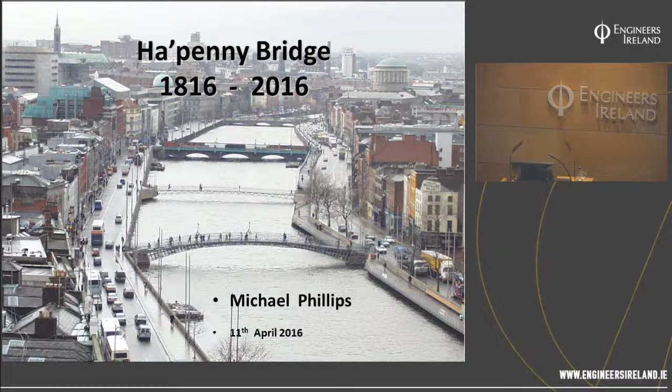A lot of the information in this paper is sourced from a more technical paper given in 2012 by Patrick Gorman, who was a senior executive engineer in the City Council, so there's a good reference point there. It's one of the things that when you work on a bridge like the Ha'penny Bridge, which requires conservation, you really need somebody who has a love for conservation and takes a real personal interest in it, because from the minute you peel off the first cover, nothing is as it appears. You need somebody who makes decisions, who appreciates the importance of it, the aesthetics, the conservation, and most importantly today, the safety aspects. Patrick Gorman was one of those engineers who brought everybody on board, and Bruce Arnold was there as a conservation architect, and we had very good people who were really dedicated to it at the time.

I'm just very fortunate. I was city engineer at the time, and to have people on your staff who can do that type of thing. As you can see from that picture, I've quite a few slides, so I'll flick through them as quickly as I can. Just to give you an indication of the issues and the problems that are there, that's why we'll put the pictures up.

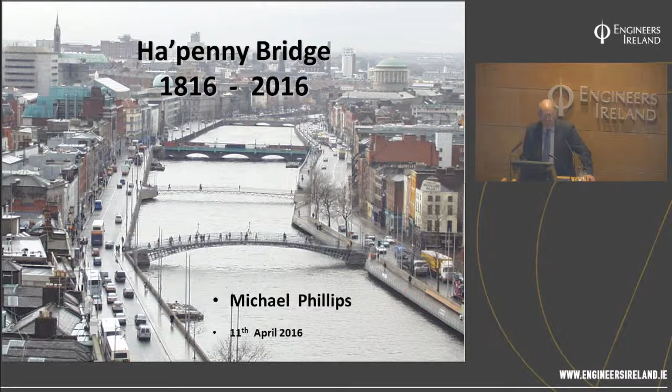You can see from there, it is very central in the centre of Dublin. It was how Dublin was recognised. It's not a suspension bridge, it's not a cable stay bridge, but it's how it's recognised. The Samuel Beckett, I suppose, is the modern day one that people will recognise, but this was really the jewel in the crown at the time for the bridges. But I'll take you through it as you do.

Just to give you an idea, you've got to show where does it sit and how it works. Look at there, you can see the Ha'penny Bridge is up just here on the right hand side, but it gives you an idea where the bridge was when the Vikings came in.

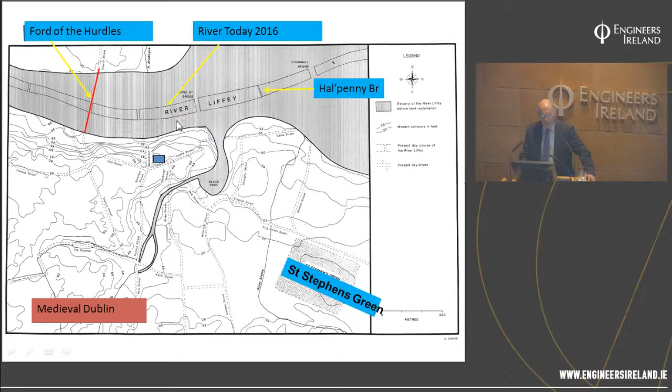And this is the Black Pool, and you can see the grid actually in the quay wall here if you stand on the Millennium Bridge. But this was the ford that would have been recognised around the year 1000. What that ford also means is that people could cross the river at low tide. Everything below that, even at low tide, only at exceptional low tides could you cross at another ford. So it gives you an idea that when you start moving down river here, you're really moving into the deep water side.

This gives you an idea of the ford that would have been there in the year 1000. When we were doing publication for the website and for the bridges over the Liffey, we got an archaeologist historian to actually work on this, because they talk about cattle being brought across and everything like that. So what would a ford have looked like?

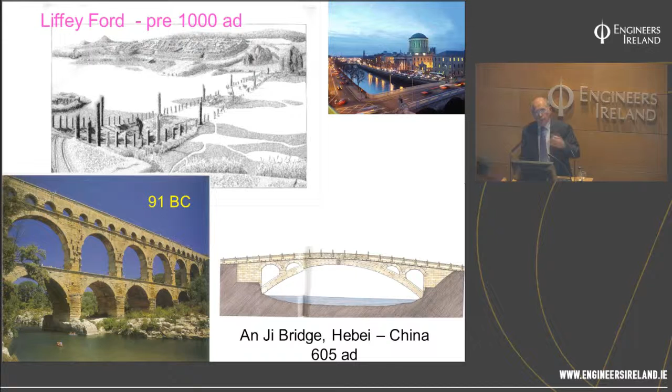Now that was in the year 1000 AD, but to give you an idea, you had the Pont du Gard there in 91 BC, and you had the Anji Bridge in 605 AD. This bridge here gives you an idea of the span, but also the principle of the weight being taken off the abutments with the arches as well. So it gives you an idea that technology in other countries, the development or evolution of things, was way ahead of us in Ireland at that time, which is a bit surprising when you consider the monks going backwards and forwards, that it hadn't come back with them, so it didn't.

But when you have a river, I suppose it starts with that you have a ford, and then when you don't have a ford but where you have water, you have ferries.

But the thing about fords particularly is the loss of life that actually occurs, because people will try to cross them. We see it even with floods today, that people will think the river is safe to cross, and it's not safe to cross, and boats will overturn, and we see that particularly in other countries today. So when you build a bridge, the number of fatalities goes to zero, and that's one reason why bridges have quite a strong affiliation with the general public, not just with engineers.

I give a talk on bridges over the Liffey in various libraries, and there's never less than 50 people, and some nights it would go to 70 or 80. One night, in actual fact, it was a ladies' historical society that had asked me, and there were 70 of them there. So it gives you an idea.

So when I was talking to a person who's building bridges in Africa about 2 years ago, I was talking about this idea again of the village and the people with the bridges. And what she said was, she was an engineer working in Uganda, and she said, actually Michael, it's not the elimination of fatalities that makes bridges so important to a local community. It's the elimination of fear. And I had never really appreciated that.

She said, it's the fear of the children going to school, and will they make it home? It's the fear of your partner going to the market with the vegetables, will they make it back? Because in the intervening hours, the river could have changed its characteristics and be in flood or whatever it is, this worry. And she said, that's really what you begin to realise - they will tell you it's the elimination of this fear.

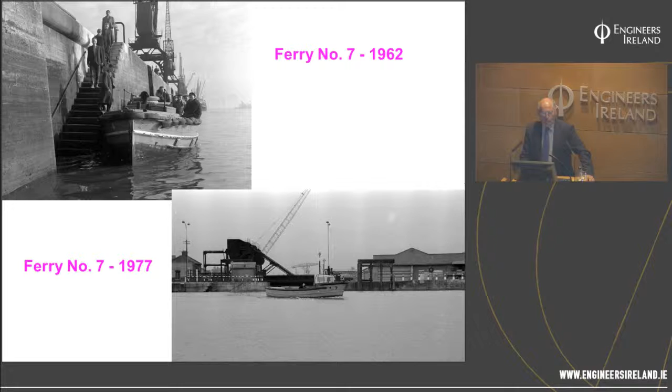And this is part of what actually happens here in Dublin - it actually eliminated the ferries with the building of the bridges. And the Ha'penny Bridge, which you see here, is just one of those areas.

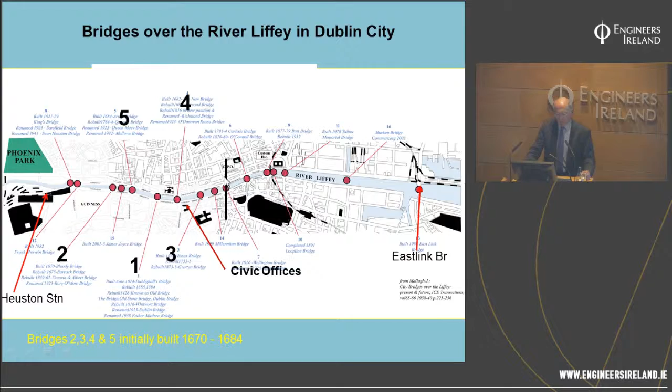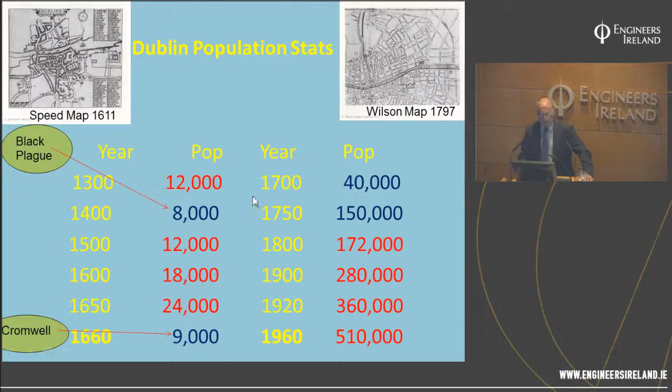Because that was the one that you'll read about in the books, where they had barbecues on the River Liffey - it was frozen over. But what actually happened was, they think there was an explosion or a volcano in the Pacific which stopped the winter, the following summer coming in here, which meant that all the potato crops failed in the ground as well, and lots of people died or were frozen to death. But it gives you an idea of the demands that were going on.

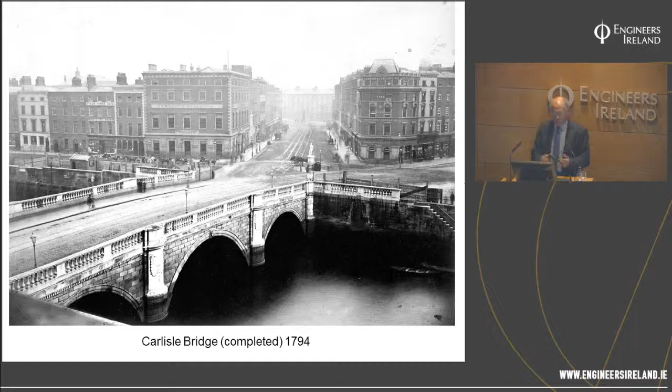Now, the Ha'penny Bridge was built in 1816, but you already had Carlisle Bridge, which became O'Connell Bridge, built in 1794. So it gives you an idea that they had already built this bridge downriver using caissons. The first use of caissons actually had come in with the Capel Street Bridge, as you would know it, or Grattan Bridge as we would know it, by a man named Semple. So the principle was established about 1753. Then in 1794 came O'Connell Bridge, with the building of the Custom House and the moving of the city centre from Capel Street to O'Connell Street. You began to see a move eastwards. But this is just to give you an idea of the other two main bridges that would have been built around the same time.

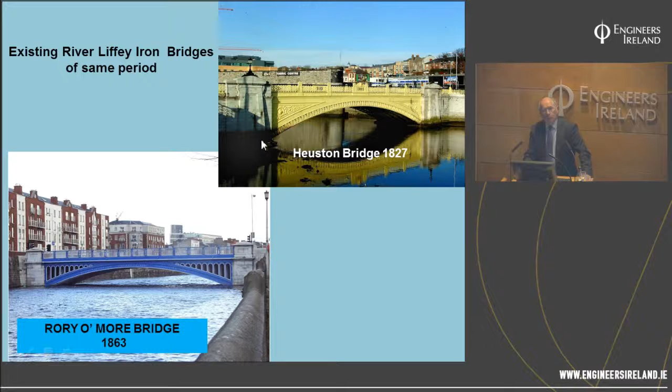The Rory O'More Bridge, which is an absolutely beautiful bridge, was built in St Helens in Lancashire and floated into place in 1863, replacing a stone bridge there. And then you had Heuston Bridge, which was a new one at the time, but that was cast just above, where Hickey's fabric place is. There was an iron foundry there, and it was cast there and just lifted out into the river.

But then the Ha'penny Bridge was actually - we've no documentary proof, but everything totally indicates - fabricated in Coalbrookdale. Coalbrookdale is a place in Shropshire, England. Abraham Darby the Third was the man. His great-grandfather, Abraham Darby the First, actually set up the place. And you start to say, why did Coalbrookdale become so important? Well, the first cast iron bridge that's still in use today, recognised nearly worldwide.

There were other ones, but they weren't of the same nature and they didn't last. It was completed there in 1781. It had a span of about 30 metres - I'm sorry, I don't have the width offhand. But then in 1791, ten years later, the abutment moved. Now, the abutment moving on single arch bridges is quite a normal thing. It's because of the thrust, and nobody knew what was there, so you had this continuous movement.

And the designer there was John Winsor. In 1973, they totally refurbished that bridge. What they did was put a concrete strut along the river bed to keep the abutments from moving any further, so they're coming closer together.

But the main reason why Coalbrookdale was so important in history is the coke. They started to use coke there to do the smelting of the iron, rather than timber, which had been used before. It was this development of coke in Coalbrookdale that really gave a kickstart to the Industrial Revolution, because suddenly they could do large volumes. And what they started doing was developing pig iron into ingots, which could then be used in other smelting places further down.

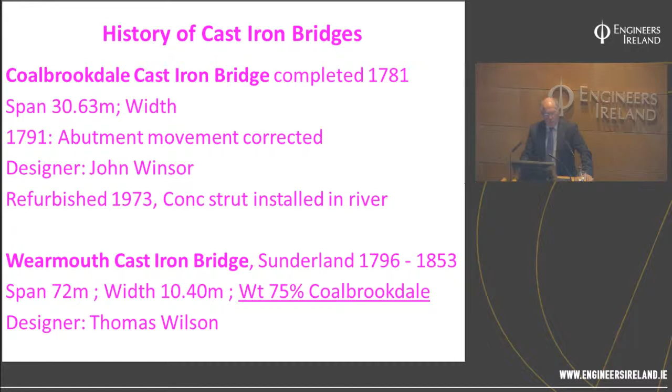Part of Paine's bridge design was actually used in the Wearmouth Bridge, and Thomas Wilson did an awful lot of bridges out of the Walker foundry.

So then when you look at Dublin, how did the ferries come about? The city council had a charter from Charles II and let out the ferries - you couldn't just set one up. The one at Ha'penny Bridge was known as the Bagnio one, referring to a brothel that was on the south side, just where that ferry came ashore, and that's how it got its nickname, like everything in Ireland.

The Ha'penny Bridge is also located in the tidal zone, as I said, and Essex and Carlisle Bridges were completed earlier. The span here is about 42.8 metres, the width of the bridge is 3 metres, and the rise over the full span is there.

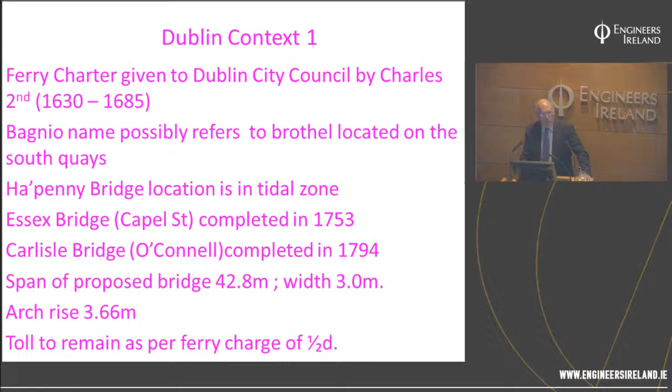The toll was to remain at a halfpenny. When he got permission from the City Council, the toll was to remain as a halfpenny - which was the ferry charge - and also that if the citizens of Dublin didn't like it, he'd have it taken down within 6 months.

Now, like everything in these countries, nothing is really a straightforward decision. We look at the complexities of society today and how we've got to keep everybody happy - back then those complexities were there too, maybe on a smaller scale. There was a guy named John Claudius Beresford, whose father before him had been a major leader, unofficially the King of Ireland. He was an alderman, a member of the council, but also involved with the Port and Docks and the Revenue Board. The Lord Lieutenant at the time fired him, saying he should have nothing to do with it because of all the dealings he got involved in. He was so powerful that he had the Lord Lieutenant recalled - that's how he was reinstated into his job. It gives you an idea of how powerful he was.

His family were also related to other Beresfords in Derbyshire who founded the Butterley Iron Company. The reason I mention that is his daughter married Walker's son, who was the guy working with Thomas Paine - so you can see they were involved in the iron industry, and he was aware of it as opposed to masonry.

Now what actually happened was in 1802-1803, the bridge just upriver as you come down from Christchurch collapsed in a storm. The bridge designer Thomas Wilson was invited by the City Council to come over and see could he propose an alternative. William Walsh, who had the ferry, and Beresford were on the City Council, so they would have been aware of this. Wilson actually put forward a single span to cover the bridge, but the City Council didn't accept it, and they went instead with the 3 stone arches you see there today.

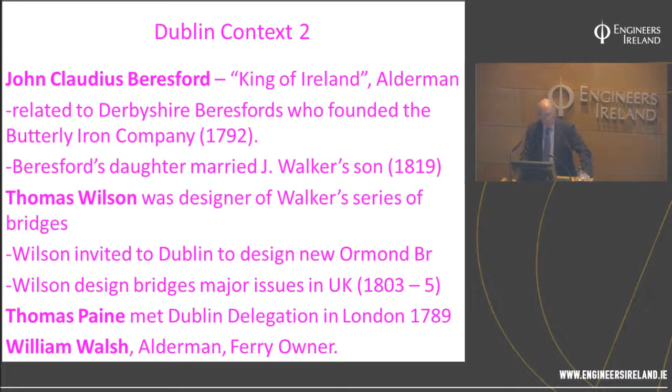This gives you an idea of the Sunderland one that was there, and that was only taken down around 1853. So they then approached Coalbrookdale.

This is how we end up going back to Coalbrookdale, with the experience of Beresford, who would have been well aware of the technology, and William Walsh, who was the guy who had the ferry. They went to Coalbrookdale, and Coalbrookdale came up with this single arch, which at the time was quite fantastic. When you look at the Liffey today you might think it's quite calm, but you've got to appreciate there are three dams on that river, so it's very well contained now. You can imagine when the rains came down, it was quite normal for at least one bridge a year to collapse on that river, because the arches would be eroded by the ground and the water.

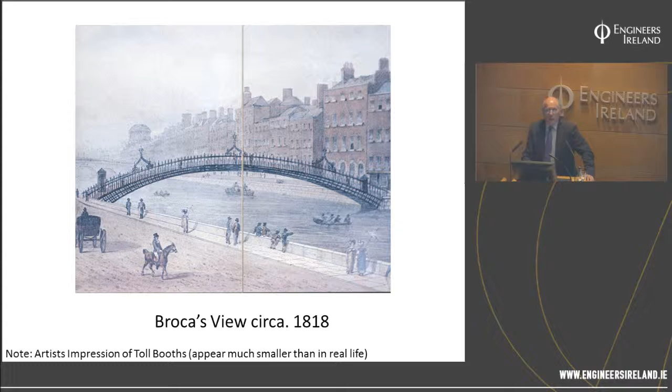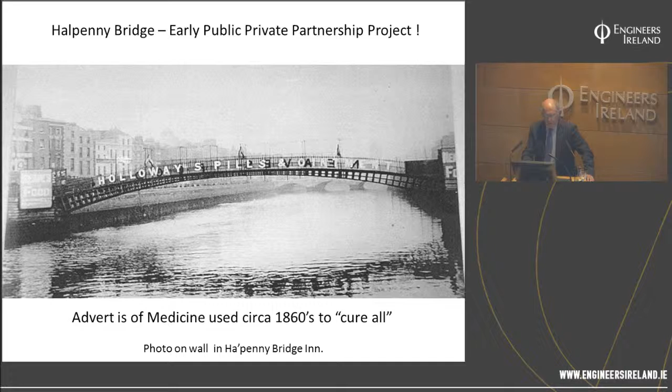He decided then on this design, and this was the bridge that got built at the time. You can see the hiring out of space, which we've sort of gone back to nearly again today with the public-private partnership model. Then there were the turnstile booths, which we have very few pictures of, and they were there on the south side.

While the Chairman was talking about the love relationship with the bridge, there was also a hate relationship. The bridge has gone through periods of love and hate. Hugh Lane wanted a place to put all his paintings and wanted to build a gallery, so his whole idea was to take down the Ha'penny Bridge. He hated it, and wanted to build a gallery with a Ponte Vecchio like the bridge in Florence, and put all the paintings in that.

There was another man who was a very strong personality at the time in Dublin in 1914, Martin Murphy, who was involved in the lockout, and he said you shouldn't waste taxpayers' money on such a thing. Then Hugh Lane got worried about fire or dampness and things like that. But while this was all ongoing, Hugh Lane happened to be on the Lusitania, which sank.

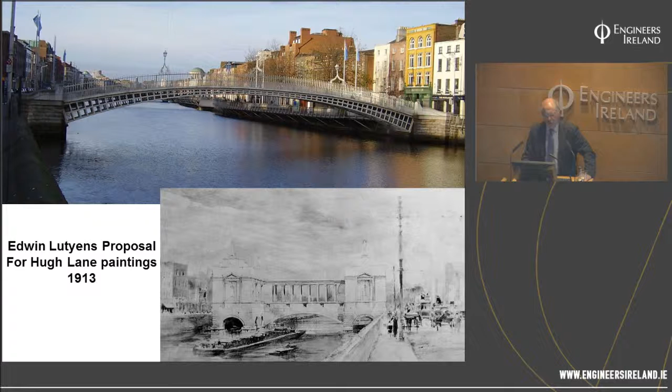Then there's the story about whether his paintings should be in London or Dublin, and what they did was split it halfway. It gives you an idea that there was a love-hate relationship, and there were fairly powerful forces there as well. But the historical facts are as I've already said.

One of the things is that cast iron has a low tensile strength, is brittle with no ductile range, and the problem was that quality control was always an issue. It had many names.

It was called the Wellington Bridge because of 1816, the Battle of Waterloo. The Triangle Bridge got its nickname because Beresford was involved very much in putting down the uprising of 1798, and one of the torture treatments was the triangle at the time, where they flogged people, so Dublin people called it that because he was associated with it.

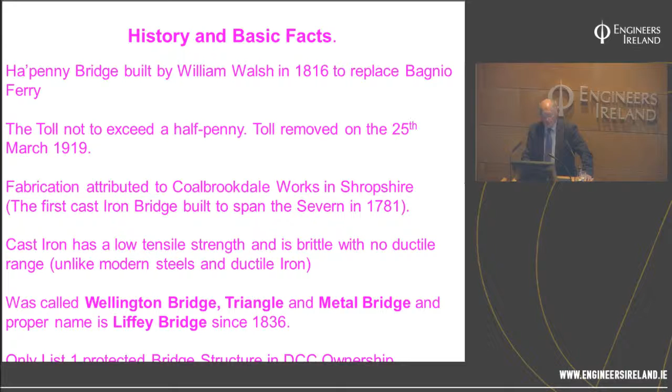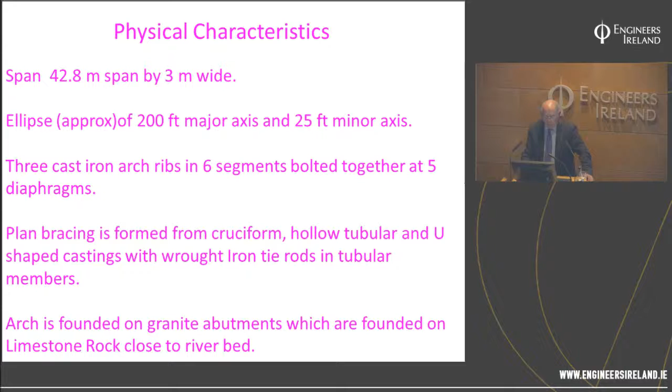Then you had the Metal Bridge, but the proper name is the Liffey Bridge. It gives you an idea of the ellipse, and that's part of it. There are three cast iron ribs bolted, and it's founded on the granite. The river rock there is actually quite high, so it sits right on the river bed. We're very, very fortunate there.

In 1998, we decided we needed to act, because there was no access for people who had difficulty walking. The sheer volume of people at that time was about 24,000 people a day crossing it, over a 14 to 15-hour day, not a full 24 hours. So we had serious concerns, especially where it came ashore at Temple Bar, about the safety of people on the footpath given the volumes of traffic.

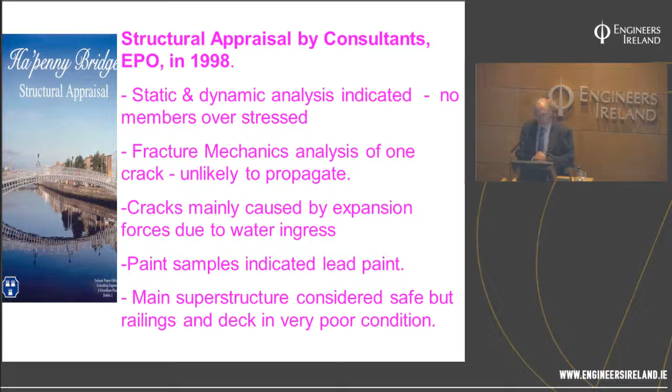So we had a structural appraisal carried out because very little maintenance had been done. What we found was that no members were overstressed, and a fracture analysis of one crack showed it was unlikely to propagate, with cracks mainly caused by expansion forces due to water ingress. Paint samples indicated lead paint, and the original paints had just been painted over repeatedly. The main superstructure was considered safe, but the railings and deck were in very poor condition.

Just to give you an idea of the location, they call the South Quays here Crampton Quay, but most of us would know it as Ashton Quay. Then you have Bachelor's Walk on the north side, and Liffey Street.

When you go to do something with a bridge like that, you have an awful lot of what we call non-technical issues. First, it was a very confined site because of the sheer volumes of traffic. All the works had to be carried out from a pontoon in the river, and the navigation channel had to be kept open because boats went up and down the river. Then there was the impact on local business, which was one of the major issues, because on Liffey Street, people felt that about 80% of their business came from people who came across the Ha'penny Bridge.

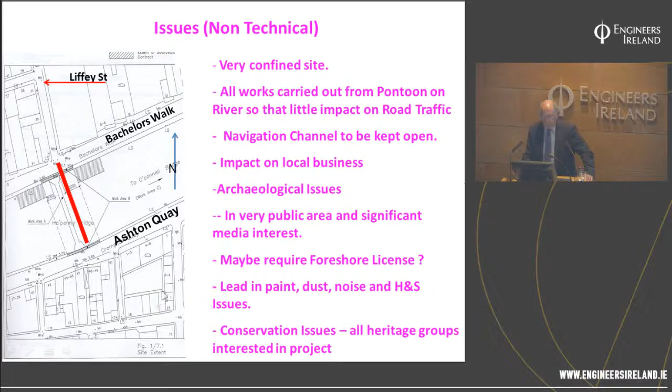Then there were archaeological issues, both on the ground and in the river. Did we need foreshore licenses? Then there was lead in the paint and dust issues, and the conservation issues. Everybody took an interest in it, so they did.

So what we did was, we had a plan for a Bailey Bridge to be put across as a temporary bridge, but we decided to try it for about 24 hours without one first, and as you know, all hell broke loose. So we had the Bailey Bridge put together over a weekend and put it in, but it was already in our plan.

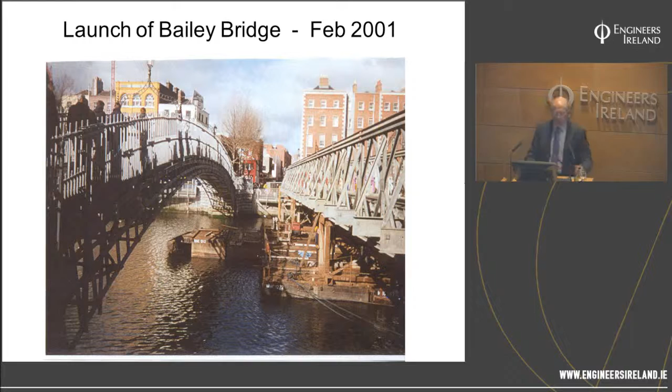If any of you remember that, quite a number of people wouldn't cross the Bailey Bridge because, although it was perfectly safe, it was bouncy, and quite a few people felt slightly unsafe with the bridge bouncing due to the sheer volume of people on it. But as you know, they're very, very strong structures, so they are. That was part of the process.

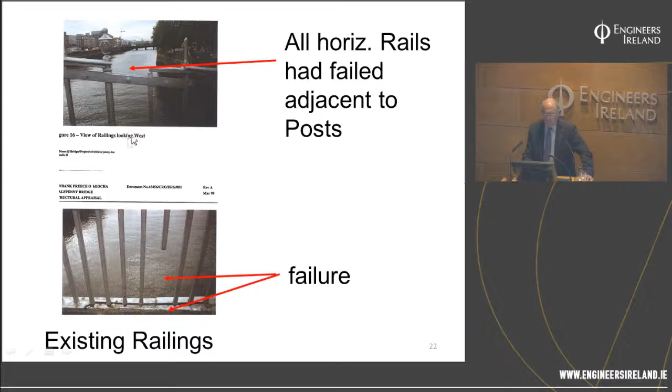Just to give you an idea, you can see here the railings had failures, with pieces missing. And again here, the railings were supported off pieces they shouldn't have been supported off, and scaffold poles were used for temporary repairs. It was really in a very bad state, so it was.

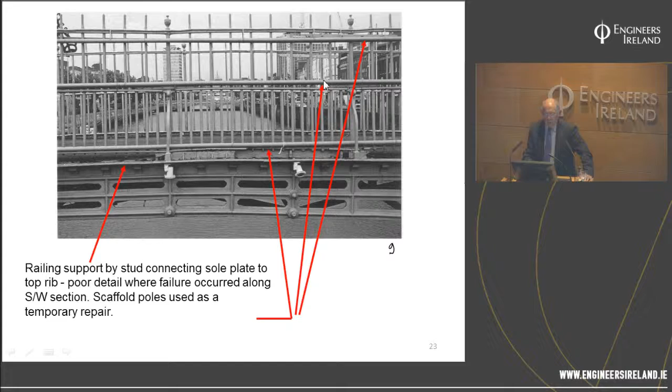The superstructure overall was in good condition, but we did dye testing for cracks, railing checks, and paint testing. What we found was that the geometry of the original build of the bridge wasn't built the way it was meant to be built. There was an imperfect ellipse, and there was no bracing in some bays.

What we discovered was that, for instance, part of the bridge here should have actually been at the opposite end, things like that. But the bridge had held up during that period of time, so it had.

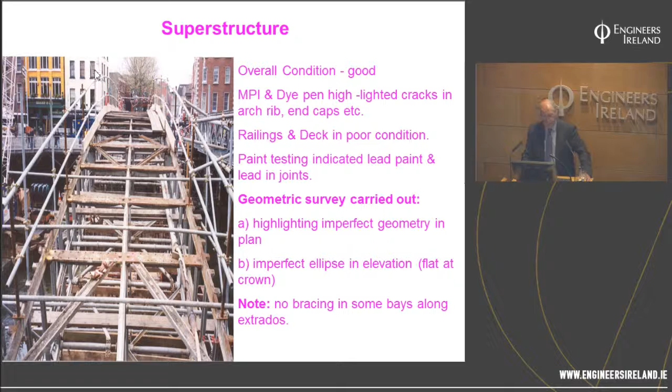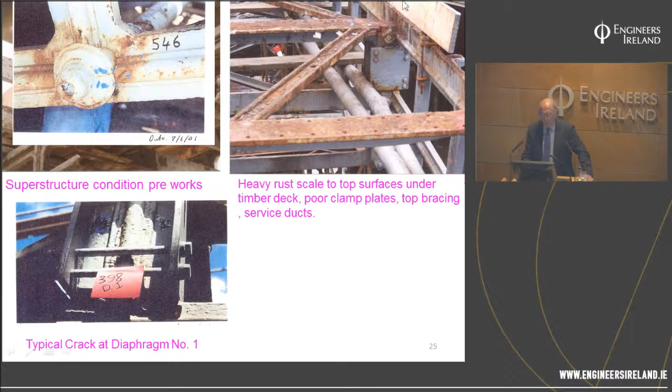This gives you an idea of some of the conditions of heavy rust. With this channel, you might think it provides strength, but what that web did was gather water as well, causing rust and similar issues. So we had major issues there. You can see a typical crack at the bottom as well. And we couldn't actually take off those caps.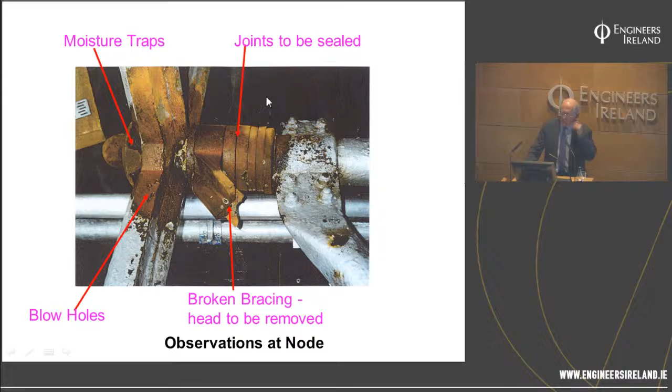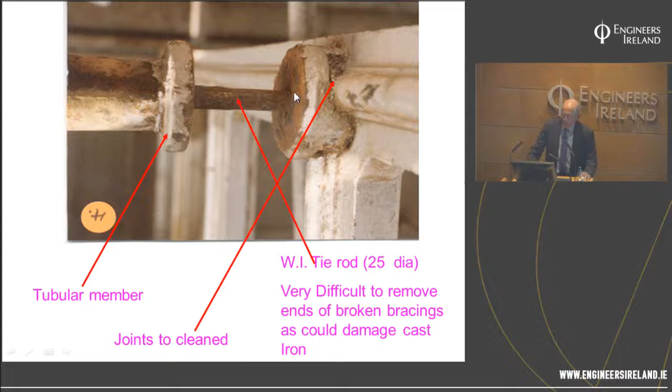We had to work around them. You can see where there was broken bracing, joints had to be sealed, moisture traps and blowholes, and it was very difficult to remove the broken ends. Everything was seized on it, so we had to work very carefully to get it out.

When the original survey was done, we did a survey, and when the contractor was tendering, it was based on what you could see. But when you actually went in underneath, it was a totally different ball game, for want of a word.

So the job had to be divided into two parts. One was the pieces you could take away and have either refurbished or new pieces fabricated off-site, and then the pieces that had to stay on-site.

For the piece on-site, it was even a worry that we had to scaffold it all out and put sheeting all around it to protect it. One of the problems with that is when you put the scaffolding and sheeting up, if strong gale force winds are coming, you then have a lateral load on your bridge, and is that going to create problems? All these things had to be taken into consideration at the time, as well as putting temporary supports in the river.

These were pontoons resting on the river bed. Will it affect the flows if we get very heavy rains and a lot of water has to be released, or extremely high tides? So you had to take all these things into consideration, do a risk analysis on it, and see how it would work.

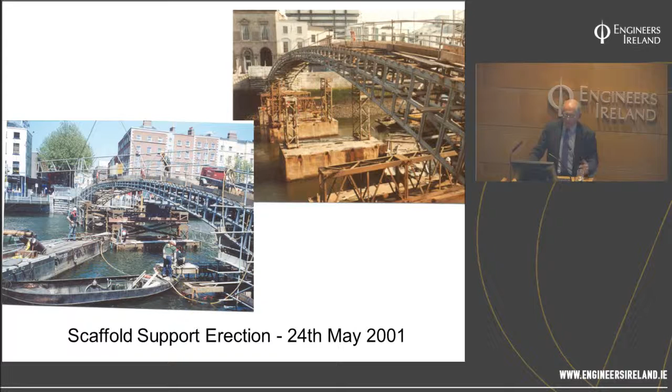This gives you an idea of the sheeting and scaffolding that had to be carried out over the full length of the bridge, so people could work there, but at the same time making sure there was no dust being carried around or the river being polluted at the time.

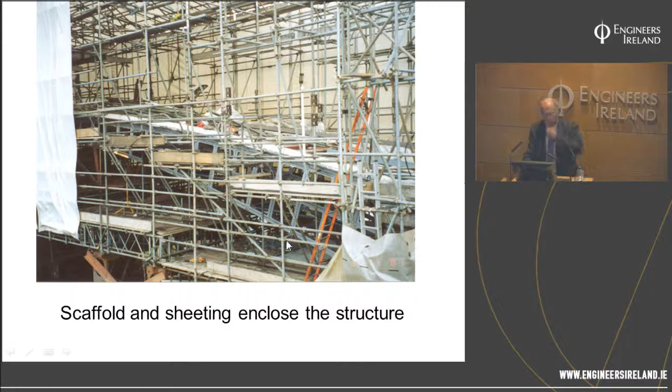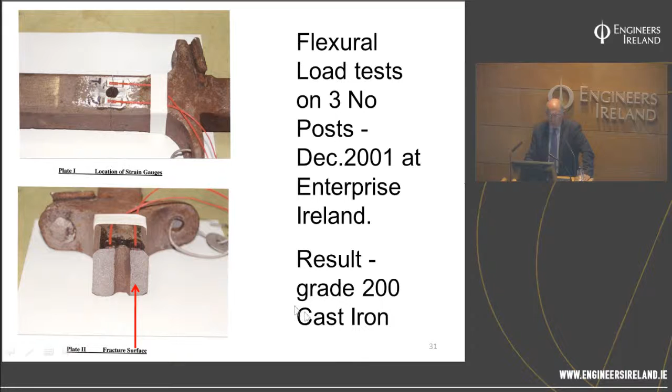We had flexural load tests carried out on all these pieces, and the result was a grade 200 cast iron, because how do you actually work out what the strengths were? Various pieces were taken off-site for examination, testing, refurbishment, and for Brinell hardness and those types of tests.

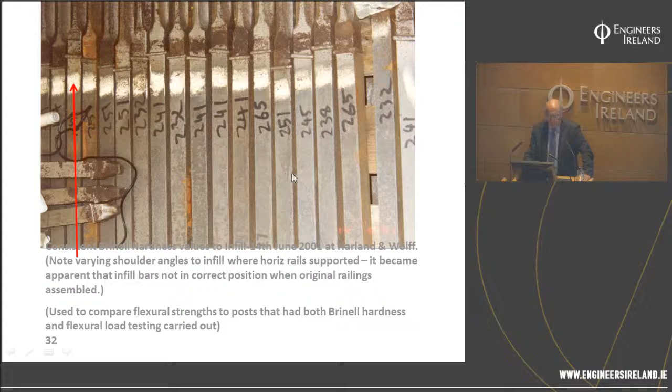Here you can see where a piece was broken off on this side and other parts were cracked. So there were various options on how to put the railings back in while maintaining conservation and the importance of the bridge, and how we actually fix them to the deck to ensure that they can be safe.

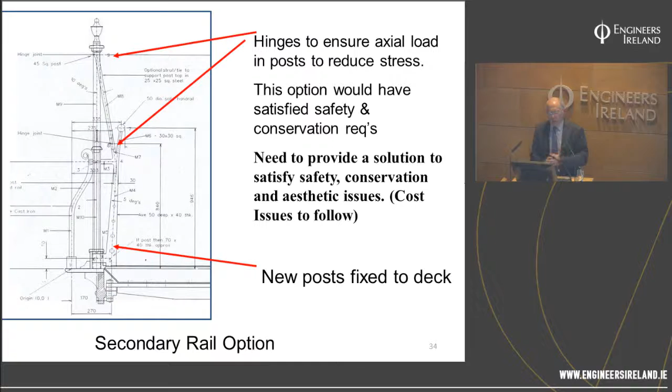The other question that arose is how do you define what's a safe deck and railing for the crowds of people crossing this bridge? One worry about a pedestrian bridge is that if a lot of people are watching something on the river and they turn to look at the other side because something passes underneath, the loadings that arrive on the bridge affecting the railing can have severe effects, the worst situation being that the bridge would turn over.

We were very fortunate that in the 1973 refurbishment of Coalbrookdale, they had the Road Research Laboratory in the UK carry out actual crowd testing of railings to see what the rails on their bridge could take, and that provided us with a great baseline to work off. So then what we had to do was look at the infills.

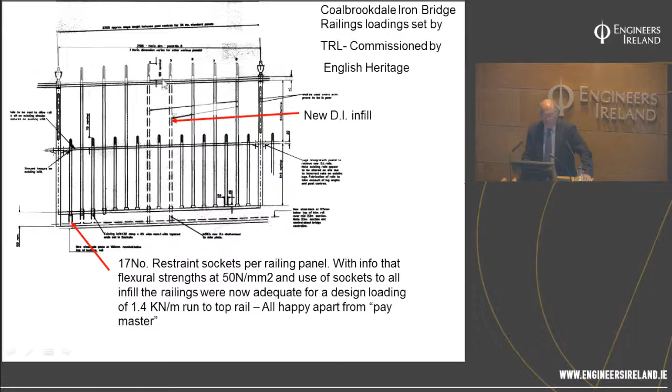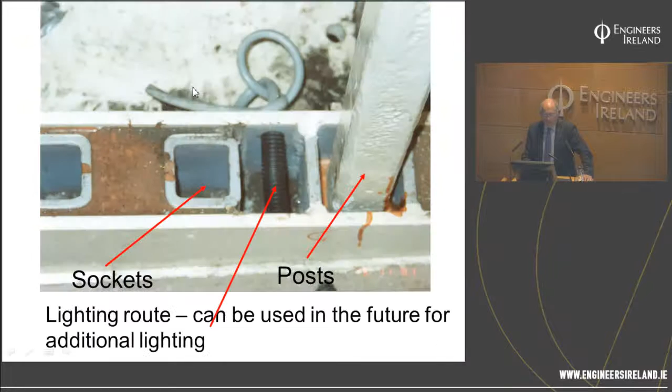Everything had to be measured because nothing was really replicated in the original, so every item had to be done individually. This gave us an idea of where the sockets and strengths had to be built in, and then the ducting for electrical lighting to go in afterwards.

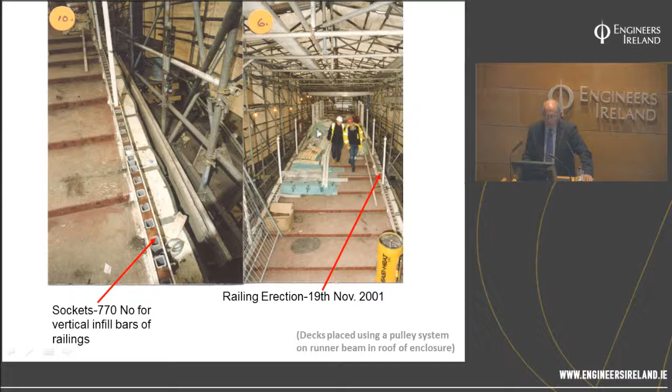This gives you an indication of what it was like inside, and you can see the finished deck as it was put into place, the railings being erected, and the sockets being installed.

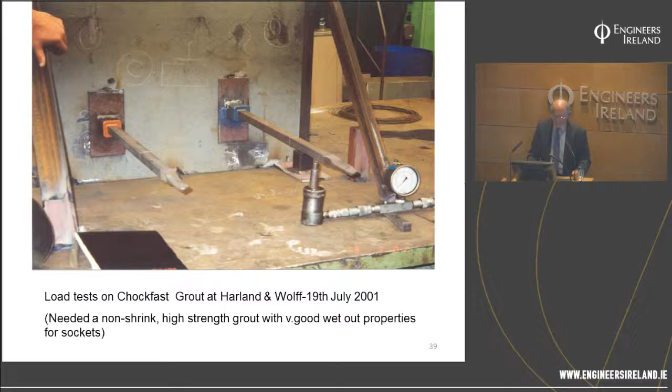Because everything was a one-off, everything had to use the best grouts. So we even carried out load tests in Harland and Wolff, who were the main contractor, to actually test the grouts, to make sure they would achieve what we wanted.

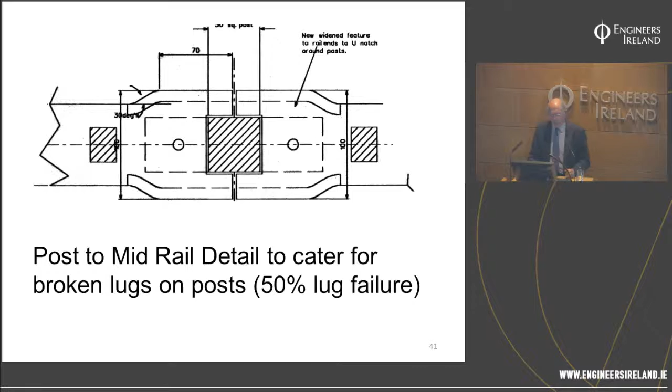So the grouts were put into position, and this was the railing post, because we had to try and maintain the old railing posts with the new fixings. Chockfast was the stuff used, and you can see the difference before the final coat of paint goes on. Then we had to get these finials done.

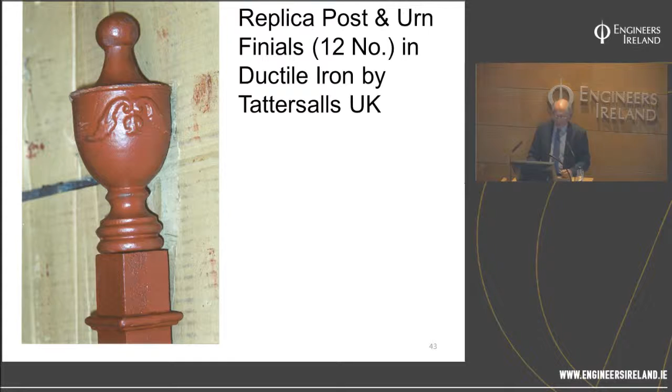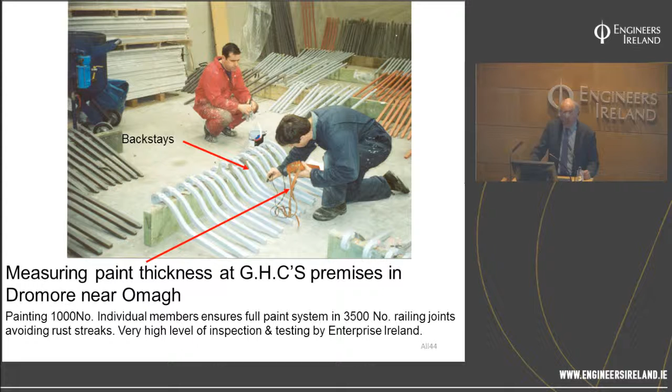For the deck, Enterprise Ireland actually carried out all the testing for us, and every piece was tested. We just didn't spare on it, because when you take a bridge like this asunder and put it back together again, nobody's going to be looking at it for a long time.

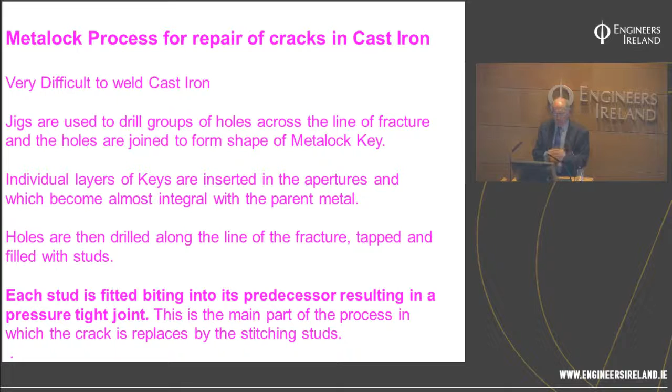One of the things was, what do you do for cracks that appear? It's very, very difficult to weld cast iron. We did do it in one or two locations, but it's not something you can carry out throughout. So the Metalock process is where you drill holes and put in pieces of iron. It's all done cold, can be done on site, and they're like keys inserted that become integral with the parent metal, then filed down.

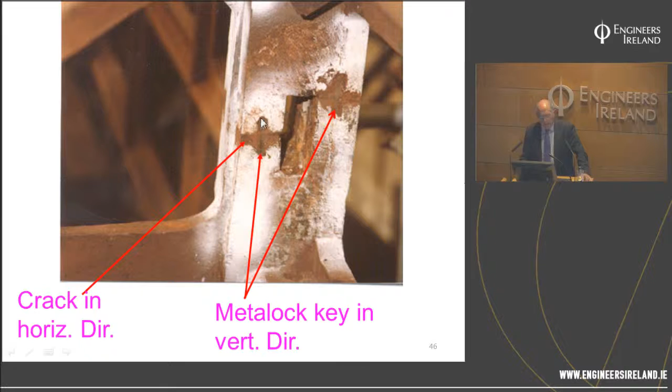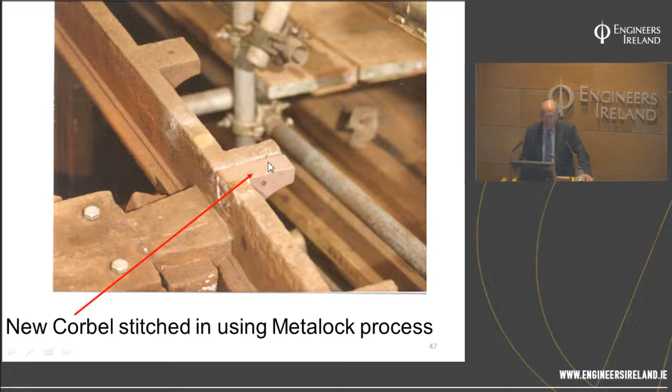This is what you actually have here. You can see the stitch in the vertical direction and in the horizontal one, and this is a vertical one over here. It's a patented system, but you can see where it was fixed onto a member as well, using the system. And it worked extremely well.

But the problem then arose coming down to the abutments, where you can see how the deck lifts off in the old bridge. The old bridge originally was just timber, and if you remember the other bridges that opened for the Millennium, one in Paris, one in London, and one in Brazil or somewhere, they had timber decking, and when it got wet, everybody just slipped and slid all over the place. So they had to close three of them.

We became aware of that with the Millennium Bridge, just upriver, and we used aluminium there. But on this bridge, there was timber up to about 1970, then felt was put on it because of the danger of slipping. But as you can imagine, roof felt on a bridge deck is not really an acceptable solution.

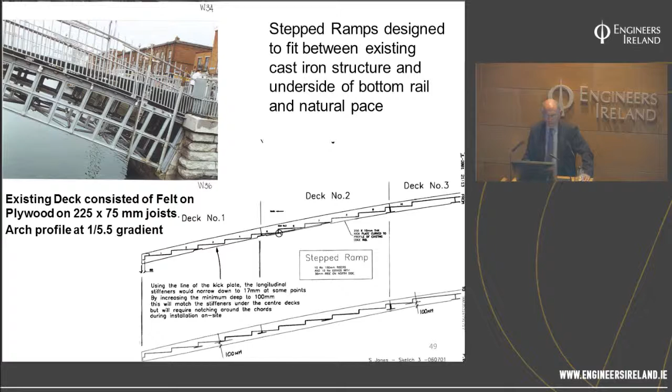We also wanted to make it more accessible. While we knew it would never achieve full wheelchair accessibility, we wanted to make it as acceptable as possible. So we had templates carried out by Harland and Wolff of the whole deck to see what the structure was like. Then a whole new deck was designed using metal to give us the steps you see there today.

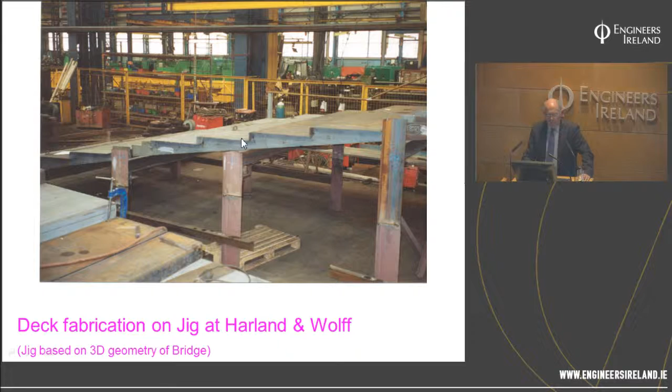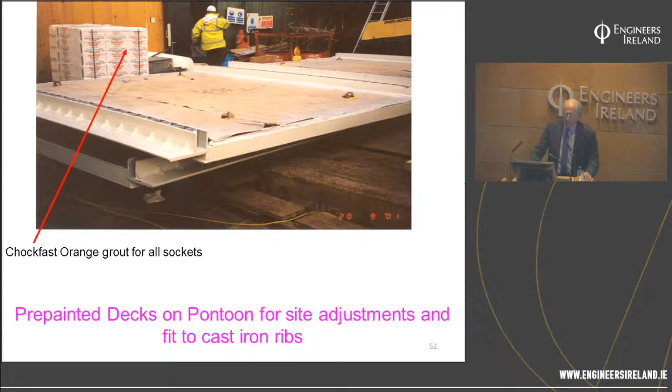Now, one of the other parts was that on the deck, the site works had to be done on site, and it all had to be shot blasted, and you can see there how the shot blasting was carried out.

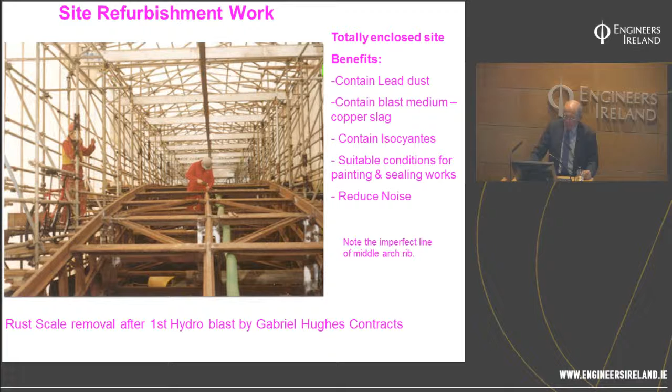What we found was, because the site was totally enclosed, everything could be contained on site and then moved off site easily. But we found that wasn't enough - there was still some salt contamination and graphitization was there. So we actually had to do a second dry blast to achieve a proper surface profile.

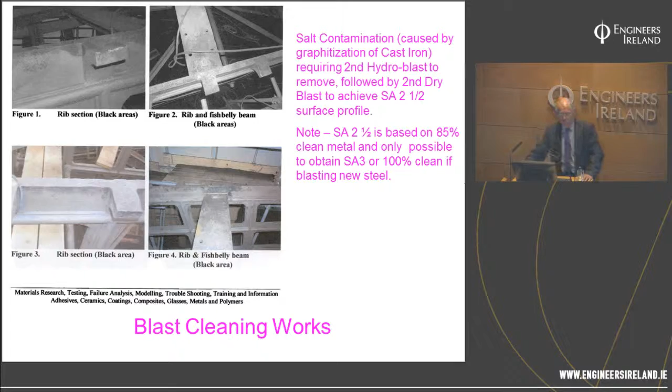The SA 2.5 standard is based on 85% of clean metal - you can only get SA 3 if it's new metal. This gives you an idea of the difficulties involved, and the conditions for the men working around those ribs was extremely difficult at times, with the dust, trying to get into the tightest, furthest corners, because rust always goes into the most difficult places to reach.

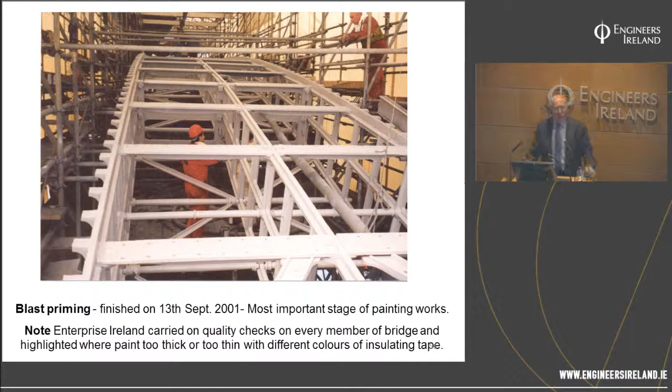So the blasting, and you can see the finishing of it, and then the painting of the works. We had Enterprise Ireland go through every single member to check the thickness of the painting and ensure it was at the proper specification, because we felt we were only going to get one really good chance. We went right back to the metal, which also helped us analyse what colour the original paint was. The actual original paint colour, which you see today, is white - mainly for navigation back then, so boats would not hit it at night or during the day.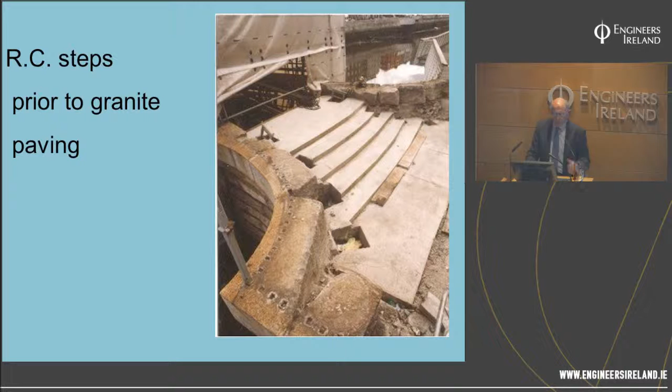Some people objected to us taking away the railings around where the toll booths were, but we had to make room - at the moment about 30,000 people cross that bridge, and you have to make room for them to gain access and cross over. So the compromise was to do an archaeological dig all around that area to find where the original booths were, since they had been removed and covered over and we weren't sure. We mapped the whole situation, and that became the compromise to make it appropriate for today.

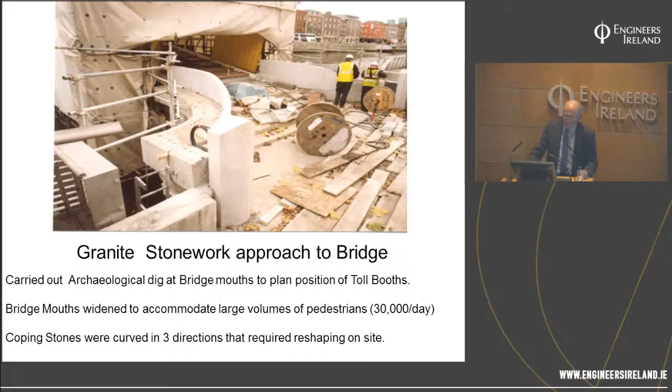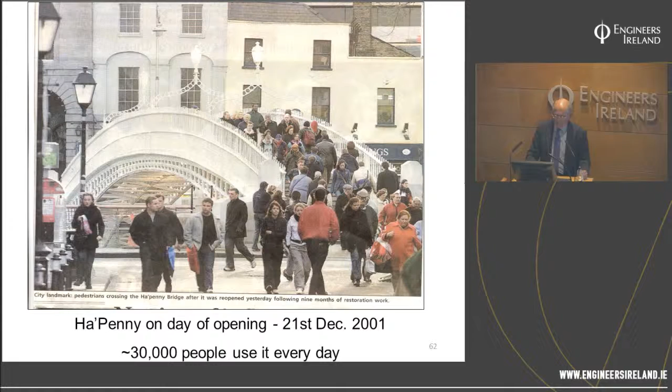That gives you an idea of the curves achieved on it, and the coping stones as well. The opening took place on the 21st of December - we thought it would be very nice for Christmas to open a bridge like that, and it would also help the shopping and create a nice atmosphere. So that gives you an idea of what it was.

When talking about a bridge like the Ha'penny Bridge, this is where it became important - before we did the work on the Ha'penny Bridge, we had installed the Millennium Bridge. When selecting that bridge, we had to be careful it didn't compete with the Ha'penny Bridge - was there a way of enhancing it instead? The design selected for the Millennium Bridge definitely did that, because now people could stand on the Millennium Bridge and look at the Ha'penny Bridge, or photograph it from the middle of the river.

The Millennium Bridge for us, what that did was it made a bridge accessible for everybody, in relation to wheelchairs or anything like that. That's why there's no high span on it. But the Millennium Bridge is a bridge of its time. It's actually a portal frame, and the bearings are at the river bed, not at the deck level.

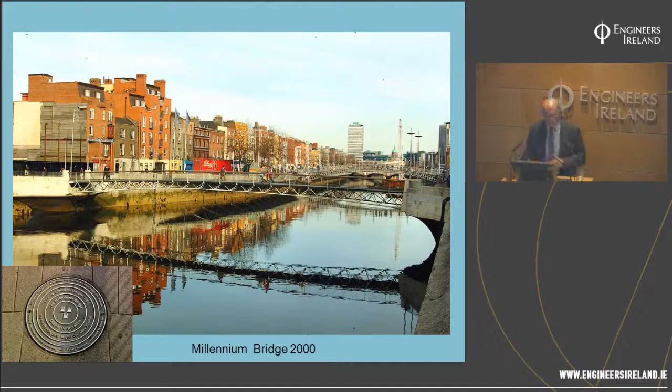When you look at this bridge, you can see it's nearly three-dimensional, and that was made in Ireland, down in Carlow, at the time in the year 2000, and lifted in by crane.

What I'm trying to show is that you have to have conservation of your existing infrastructure, but at the same time you also have to build for your own generation. This to me was one of the structures we did that went in at that time.

We were really proud of the fact that this bridge could be made. When you look at those nodes, you look at the changes in direction, it was lifted in by a crane, and the whole lot fitted there so well.

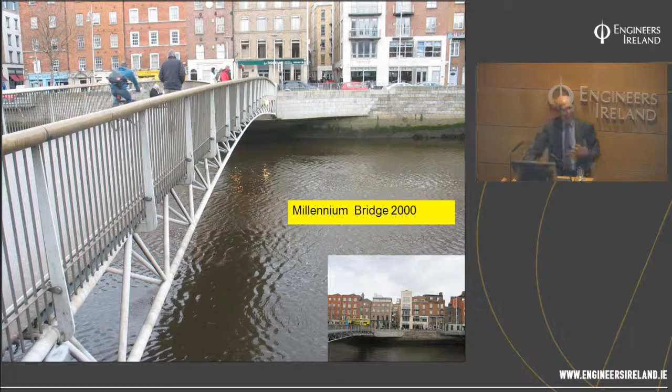On a light side, when they were bringing it up from Carlow, we asked if there was any way they could give the City Council credit. So on the Sunday morning it was being done, I went in to have a look, and of course there was the main contractor's big name across it, the subcontractor's big name on the side of it, and on the back was a sign which says Dublin City Council apologises for any inconvenience caused. So all you can do is stand there and laugh.

The Ha'penny Bridge was so well received that it got a European prize, the Europa Nostra Prize for Culture, because of the conservation work that was done on it, and quite a number of places have looked at it and learned quite a bit about it.

When you look at the age of that bridge from 1816, and if you stand on the quay there, you just think about your life. That was the original cast iron that went into it. Take your knife and fork, take the trucks, take absolutely every metal that's there - that was the original metal everything started with, because the stainless steel, chromium, nickel, all these different mixes of steels that have come out of it all originated with that bridge.

So when you stand there and look at it, you're saying this is how everything has evolved. It puts its place really in history, a bridge of that age. So that gives you an idea of what it finished up as, and the importance is that everybody still appreciates it.

We do have a problem, and this is where we as an authority, as an engineer, had to compromise. The love locks started appearing on it, and a lot of people said get rid of all those type of things. But you had to say no, because when a community takes ownership of a bridge or any infrastructure, you know you've done your job as a local authority engineer.

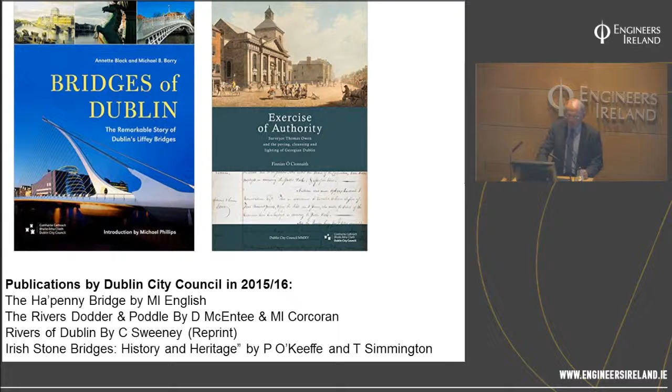So those publications should be coming out now in the next 4 months, as part of the social history, because even as we're doing all these new projects coming into the city, you will see in the next few years the development of the docklands and 1 or 2 new bridges down there being rolled out. It is absolutely crucial that we record the importance in the social history that has gone before, so that people have a good reference point. So I think that's it, thank you.

Well, I'm sure you'd agree with me that we've heard a very interesting lecture about an iconic structure in Dublin, with lots and lots of information and slides, and I think Michael did well to get through the slides and select them in a way that wasn't too onerous for the audience. But some of them, I mean, you take one particular issue about the bridge and you could spend a whole evening talking about it.

I'm glad that Michael is around to make sure that these books are produced or reprinted in some cases, because they do form an important archive which records the whole history for future generations of the bridges. Now, I'm sure there may be some questions, either general or technical. Sir.

Thank you. My name's John Madden, and I've only been in Ireland since about 2002. But for you, I've come to know Enterprise Ireland, and maybe I've misunderstood it, as an organization that would bring business into Ireland, but it seems that Enterprise Ireland was also a testing company in the past.

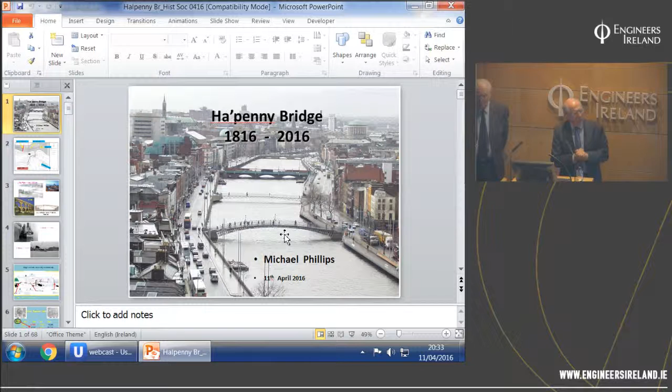One of the things I remember that we did, which was pure simple marine engineering, was we fabricated the temporary bridge alongside Aston Quay. That's right. And with the rising tide, we floated the bridge up the river and dropped it in with the dropping tide, and likewise removed it. And one of the other things we elected to do was build a canopy around the construction, so that the people of Dublin didn't know what was happening inside.

And you were right, actually. I'd forgotten an awful lot about what you're talking about. You brought me back. It was a tremendous amount of detailed work, absolutely detailed. Every component of that bridge was looked at fastidiously and in detail.

And towards the end, when we were painting the bridge, it got something like 4 coats of paint. There were a lot of carcinogenic vapors coming off, so we had to find a way out of that as well. We were worried that people might inhale the vapors, and we found some way of raising that up into the air.

But a beautiful bridge. I have to say that money does count as well, very much so. And I think it's fair to say that we sorted out our difficulties in the end, if I remember. Yeah, oh yes, thank you very much.

We won't mention the song.

Michael, let me just ask a question. You said you had a lot of problems with the nuts, the caps. Just interested to know, were they threaded, or did you actually take them off, or did you just leave them? I think we had to leave most of the nuts actually there, because they had seized onto the end. We had done load testing and tried to actually take a lot of them off, but we were unable to. So what we did was we had to approach it from the other side of the thing, but we were not able to take, I think, 90% of them off. Really, it was as bad as that. So everything was seized so badly on it.

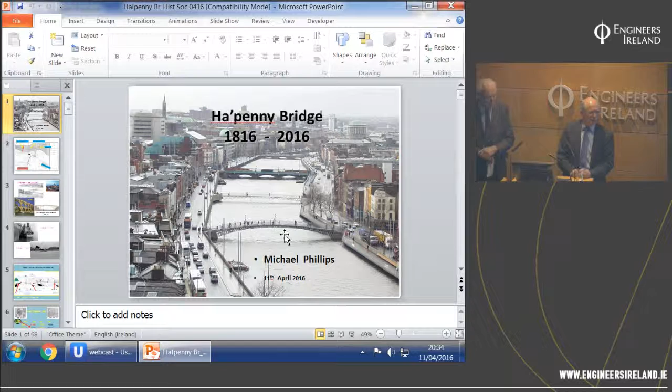Okay, so the second question I have: the grout that you used to grout in the handrails, just the material type that Aaron described when showing the slide - is there a manufacturer's name for that? Well, Chockfast was the actual name of the thing, and I think that's the manufacturer's name. So it is. We could. Okay, that's fine.

Because I hadn't come across that grout before either. It wouldn't have been one of the normal ones that we would have used on a bridge railing, you know. So it would, at the time. It was to do again maybe with the different metals, because one of the problems with some of these bridges - and it was a problem with some of the early cast iron bridges - was when you have the sun shining on one side of the bridge, and if you have different metals, they will expand and contract at different rates. So the sockets would be at one rate and the uprights at another. And so the infill material joining the two of them together has to be able to cater for both of those. Thanks very much.

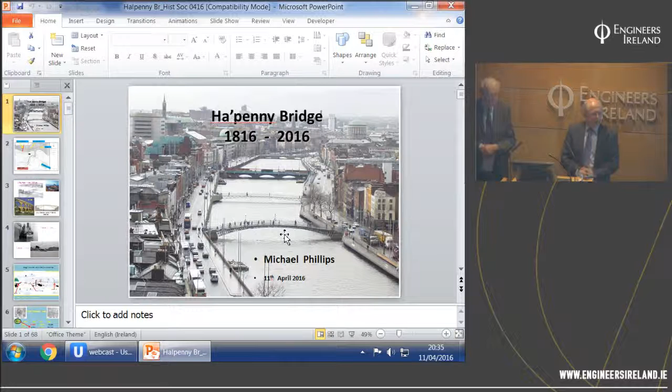Well, I think it would be appropriate, as a closing remark, to congratulate all the contractors that were involved, all the people that were involved in doing an absolute wonderful job on this iconic structure. And as Michael said just now, you tend to forget all the money that was spent and all the effort that went in, toxic fumes and everything. Congratulations to all the contractors, and also to Michael for being around to make sure it happened and giving us his insights this evening. Thank you, Michael.